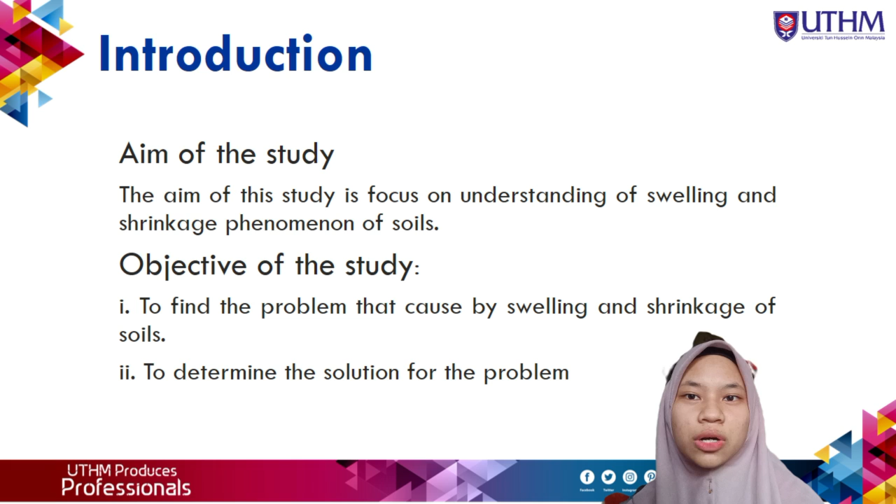I will present the introduction about our report. The aim of this study is focused on understanding of swelling and shrinkage phenomenon of soils, and the objectives of this study are to find the problems caused by swelling and shrinkage of soils and to determine the solution for the problem.

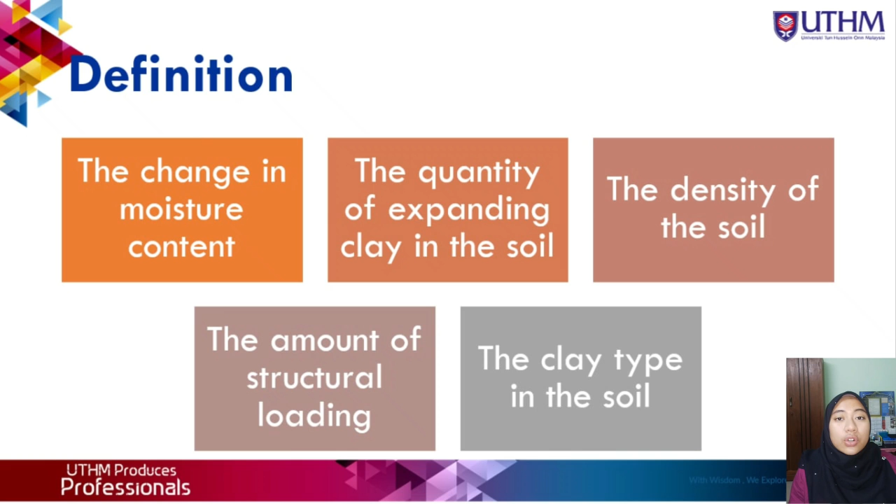The amount of structural loading also influences the amount the soil can swell and shrink. And the last one is the clay type in soil. The clay type in soil depends on the fineness of soil, because fine grained soil absorbs more water. So when it absorbs more water, when it's dry, it will become harder and cause shrinkage. This process, hardening and softening, contributes to shrink swell behavior.

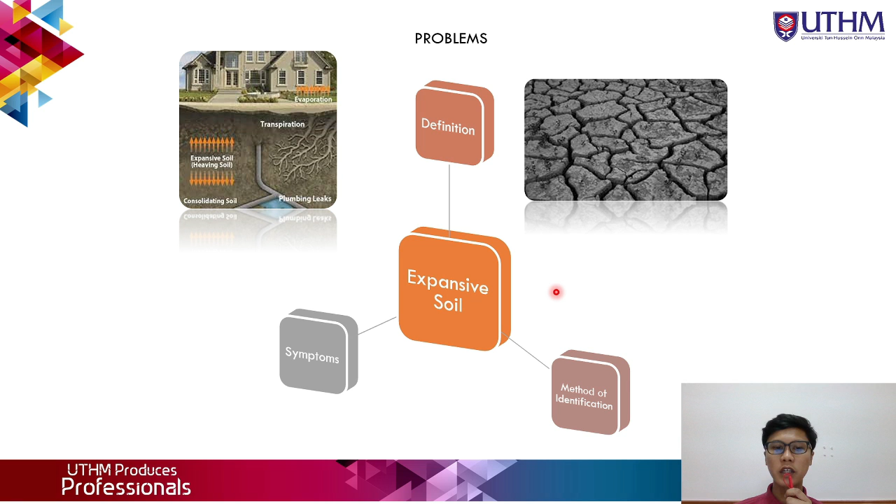Before we conduct any sort of proper identification method, there are several symptoms that we can see with our bare eyes that indicate that the soil is expansive soil. As we can see here, there are several defects that we can see with our bare eyes to the structure and the road. Let us take a look at this house. We can see there are several broken windows and doors, and we can also see some cracks in the structure. So these are several symptoms that indicate that the soil is expansive soil.

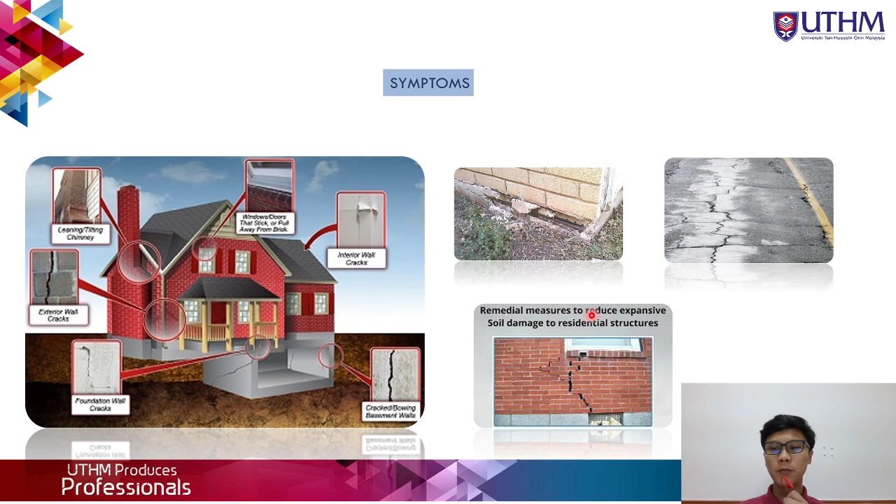Next, I will continue the presentation about the problem of swelling and shrinking of soil. Next is subsidence. Subsidence can be defined as sinking of the ground because of underground material movement. It is most often caused by the removal of water, oil, natural gas, or mineral resources out of the ground by pumping or mining activities and dissolution of limestone. Subsidence can also be caused by particle realignment caused by water infiltrating a fine grain type of soil known as loess, or compression of compressible soils like peat.

Subsidence can cause buildings to get weakened and collapse. Railway lines and roadways become twisted and destroyed, and underground sewer, power and water lines are severed. Subsidence is an extremely expensive sort of mass wasting that also represents a risk to human life because of its propensity to ruin property on a vast scale.

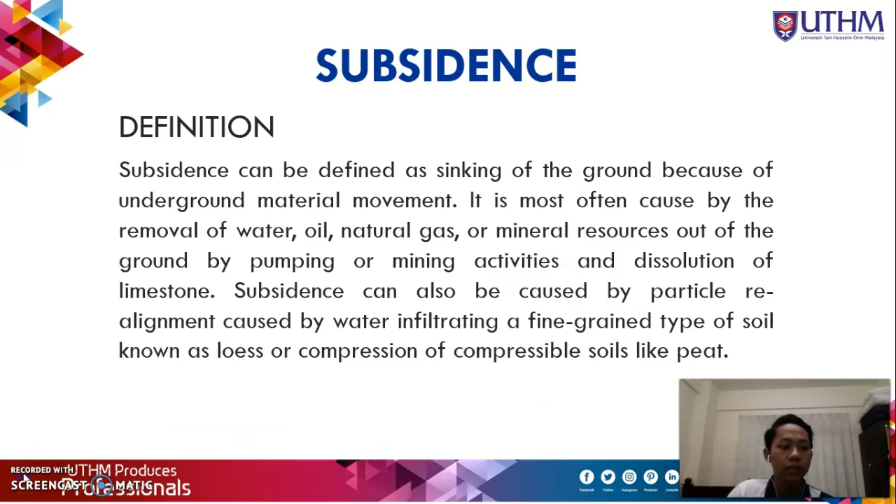Next, the solution for swelling and shrinking of soil is stabilized soil. Soil stabilization is a physical, chemical, mechanical, biological or combination method of modifying a natural soil to fulfill an engineering objective for construction process. In order to strengthen road pavement, improvements include boosting the weight-bearing capacities, the tensile strength and overall performance of in-situ subsoil, sand and waste materials.

By reducing permeability and improving overall strength, the stabilization process ensures that the soil is stable. As a result, the soil becomes more stable and capable of carrying more weight. To ensure the best construction and longevity, the most recent project or roadway requires a firm foundation. The foundation must be supported by a solid soil that can appropriately transfer the building's total load. If the soil is poor, it will consolidate and swell with time.

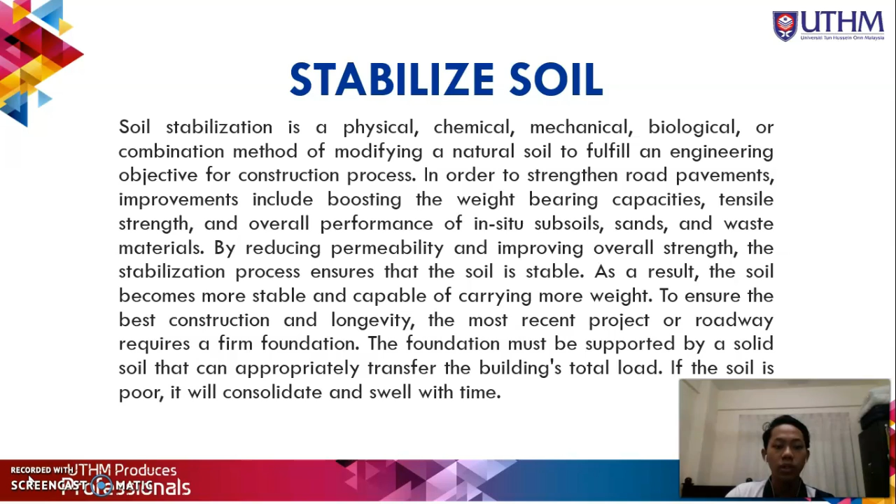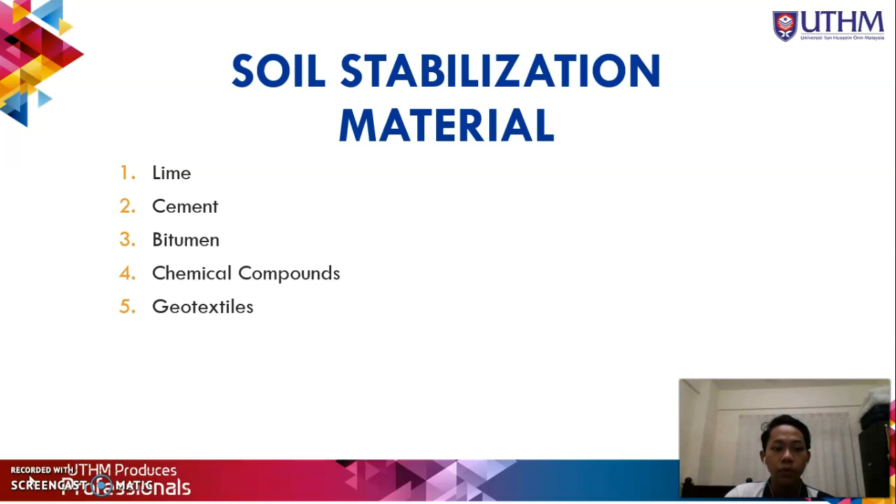There are many materials for soil stabilization. For example, lime, cement, bitumen, chemical compounds, and geotextile. And there are many methods for soil stabilization, which are mixing materials, chloride stabilization, and electrical stabilization. Mixing materials is by far the most popular approach for soil stabilization. It is because it can precisely identify the type of soil being dealt with in order to apply the appropriate substance. Mixing materials also is cheaper than the other methods.

Chloride stabilization is a common way for soil stabilization too, but it has a risk, which is it can risk the environment of plants and wildlife. And lastly is electrical stabilization. Electrical stabilization is costly, so it isn't used very often.

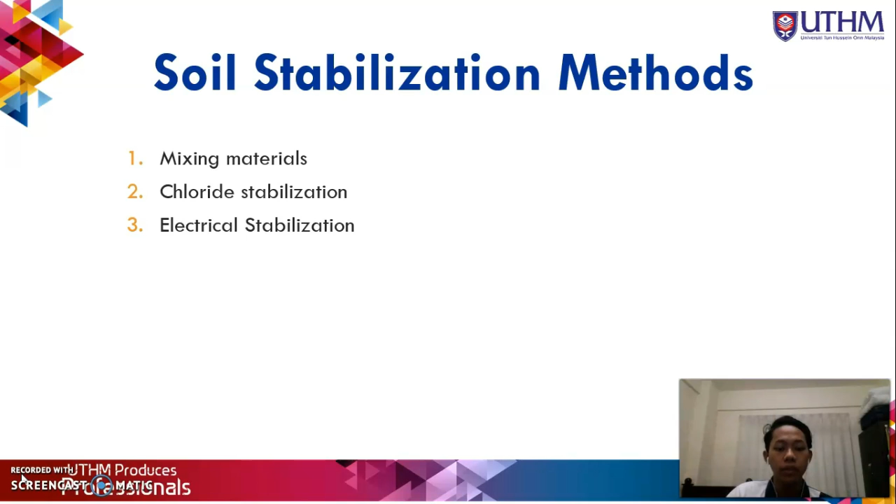Another method to overcome the problem is using a structural design approach. During the planning, the structural foundation should be built to prevent unacceptably high levels of foundation and structural disturbance. Then, if possible, foundation loading pressures should surpass soil swell pressures but should be less than the bearing capacity to keep foundation displacements below acceptable limits. To determine safe or permitted operating loads commensurate with tolerated settlements, factors of safety are applied to the ultimate bearing capacity. While for the foundation system, it should be designed so that the superstructure receives no more than the maximum tolerable distortion.

In low swelling soil situations where the expected footing angular deflection or span length ratios are on the order of 1/600 to 1/1000, or 0.5 inch or less of movement, shallow individual or long continuous footings are frequently employed. For the slab, stiffened mat foundations can be used in swelling soil locations where the expected differential movement might be as high as 4 inches. For deep foundations, shaft deflection or spacing ratios of less than 1/600 should be achieved using this foundation.

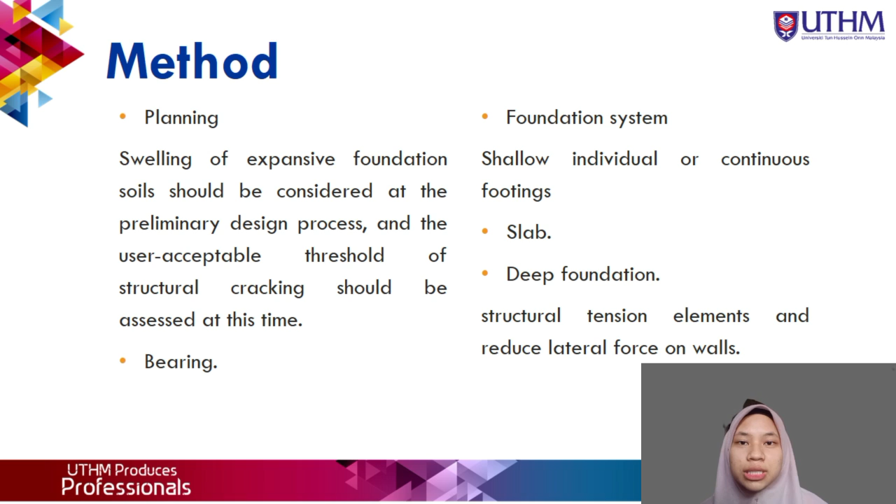The superstructure should deform in accordance with the base to allow the building to continue to perform its tasks while also contributing aesthetically to the environment and requiring minimal maintenance. The brittleness of the building materials, length to height ratio, relative stiffness of the structure in shear and bending, and mode of deformation all affect a structure's capacity to sustain deformation.

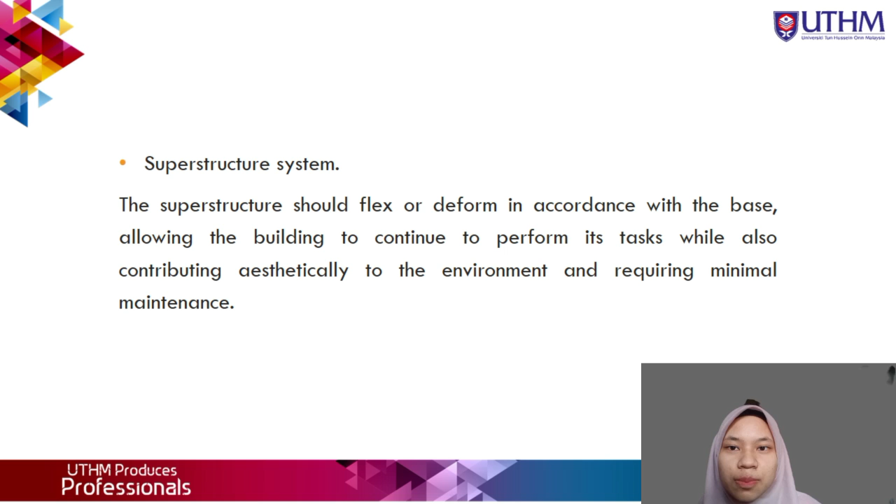So, for the conclusion of this study, geotechnical engineering is interconnected with structural engineering because the strength of a building structure also depends on soil condition. The study of geological material on both sides has played a crucial role in designing and building stable structures that do not settle, deflect, or collapse, or suffer foundation failure.

So, the site engineer plays an important role in finding solutions to overcome the soil problems that occur during construction and to make sure that the soil condition is good before running the construction. This is in order to ensure that the building is safer after construction, as well as to reduce the cost of loss and protect human life from any danger or accident.